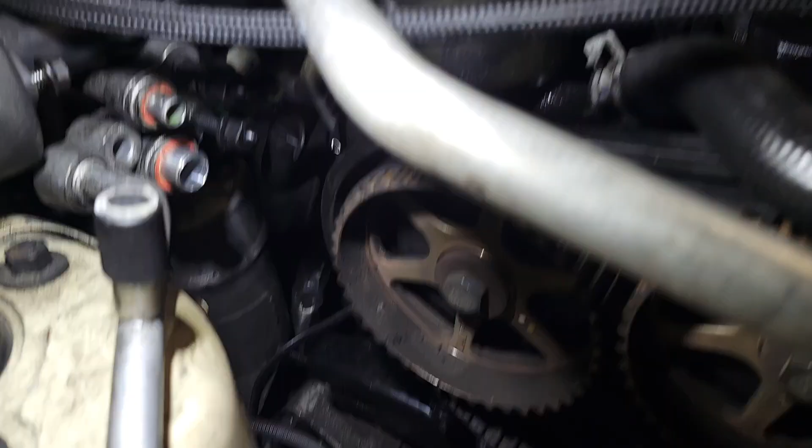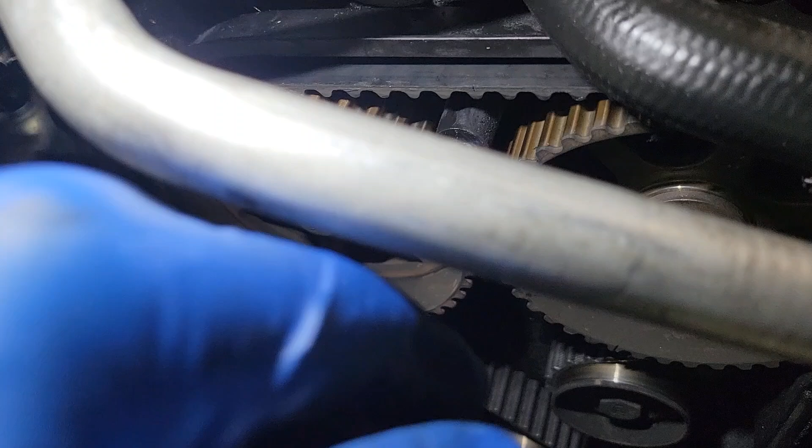I'm just stopping back to give you an update on the PT Cruiser and how that's going along for me. I got the front cover off. This evening when I got home, I had a little time. I took off the front engine mount, and the belt's extremely loose. I mean, you could almost take this off with your hand. Let me see a good way to get down there to show you.

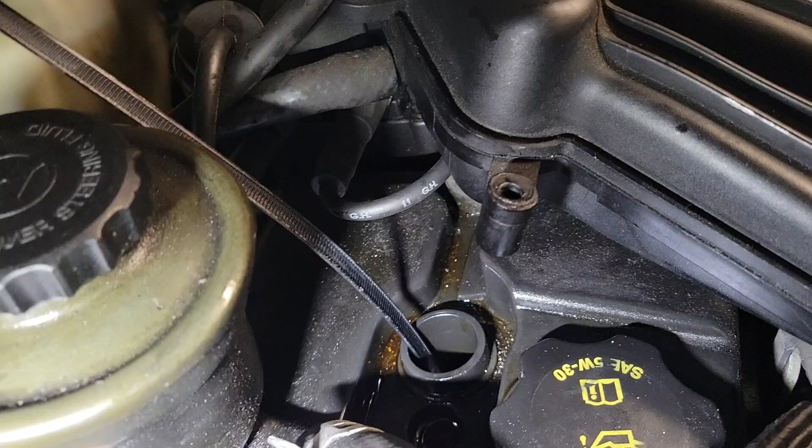So that's where I'm figuring a lot of that sound was coming from. I did take out number one plug. The tube was filled with oil, but that's kind of a different direction. Right now, I want to focus on the timing belt. And then if Ronnie wants to go for the rocker cover gasket, then we'll do that too. But that's where I imagine it's coming from.

But I have it at bottom dead center now. So I just want to look up with a borescope, just confirm that the valves aren't bent. We've seen some good compression humps, so I'm not fearing the worst. I'm expecting to see unbent valves. The tensioner I expected to be in a couple pieces, but it's actually still there. But that's the progress I'm making.

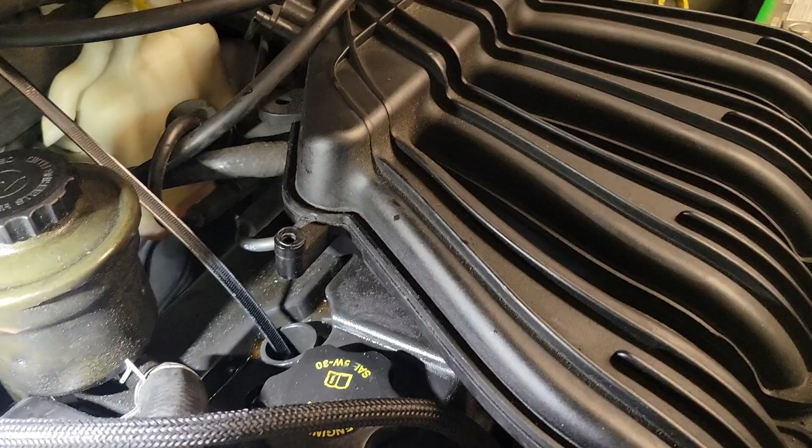I'm going to take some images with the borescope, and then I'll share them with you just to show you what the inside of it looks like. Confirm we have some good valves.

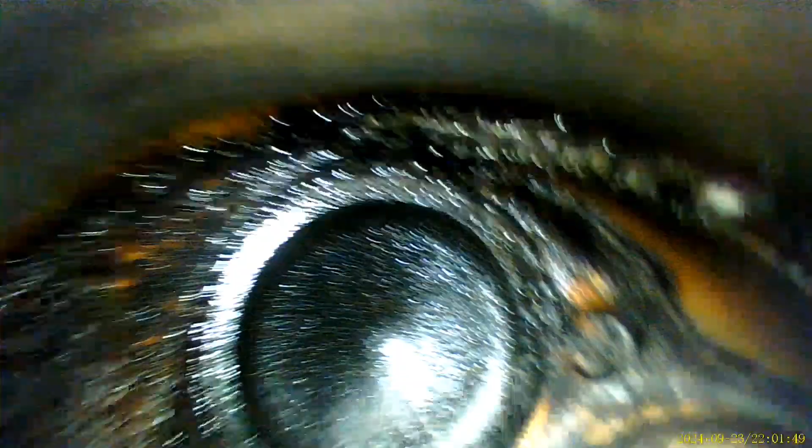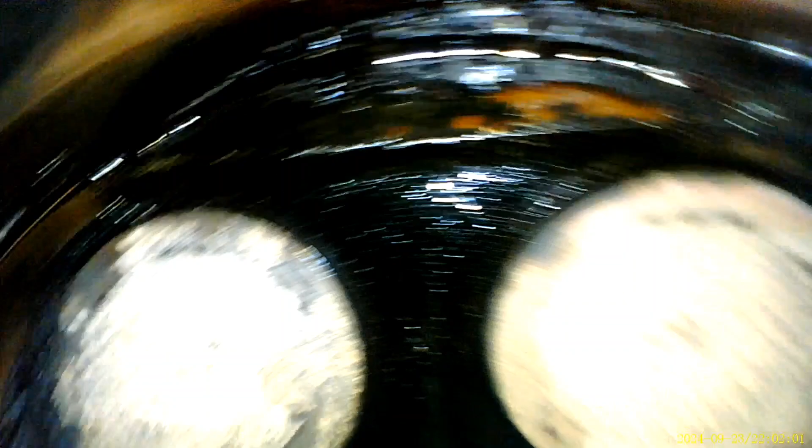All right, guys, I just want to show you. I have the crank at TDC, the compression stroke. In the top, see, it's hard to see from back there, but we're off. It doesn't even appear to be a whole tooth. It's almost like it was stretched to the point of getting ready to jump. Because if you look down where I hit with the light, look how much play is in that belt.

Every time the crank rotates, you could hear it hit the plastic in the bottom here. And whenever it rotates, you could hear the teeth hit off of here and the belt hit off of here. So hopefully that's a lot of what the noise was. Just the way it sounded, I wasn't too confident, and it's just a case where our scopes see a lot more than our eyes and our ears do, because it sounded like it had a lot more wrong with it than the timing belt. You'd expect there to be more damage or more of a difference. It just looks like the belt got stretched to the point where it's definitely ready to jump.

So, no pun intended, it was perfect timing to have it changed right now, because I think if you hit this a couple times with hard acceleration, that thing's going to go. I'll spin it again just to let you see how it bounces off there. On the scope, that's all I was getting to. We saw that image. We knew from the scope that off from the known good, it wasn't much. It was very little. That's why I was surprised to find a belt so loose after only seeing such a tiny bit of difference, but it just didn't actually jump yet. But the scope was able to pick that up.

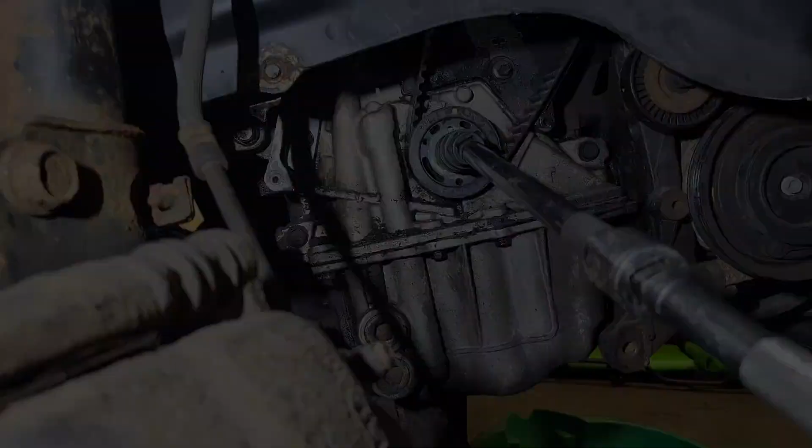Alright guys, I just wanted to share a quick tip in case you're ever in the same situation. I have to take off the timing gears without the belt on it. And the way this valve train is, you don't want to go wracking it trying to loosen the bolts. They do make holders, but I just use the old timing belt, slip it around the sprocket, put it through. This is 1 1/8 inches, and then just tighten it up around it, and bend backwards so you're pushing the rubber down onto the sprocket, making a strap wrench just using the timing belt it came off with.

I was able to loosen up both bolts in a matter of seconds with it. It took me longer to find a wrench than it did to actually loosen them. So just a quick tip if you're ever in that situation too, because they do make holders that go in between the gears, but they're just cheap.

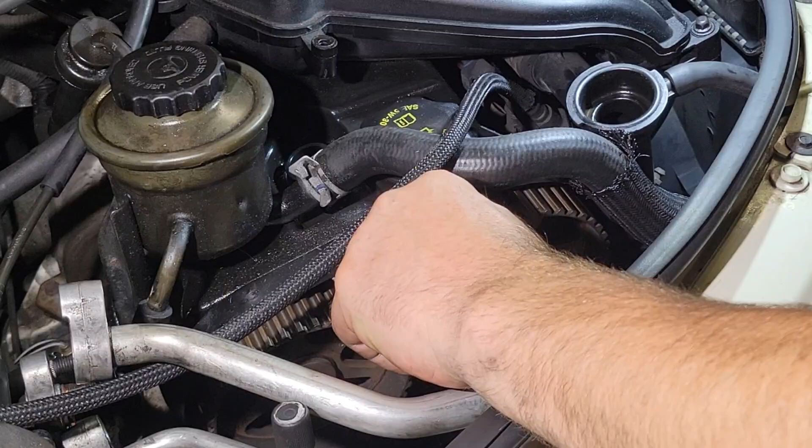Most of them anyways from Amazon are just cheap plastic gears made to hold the cam there while you replace a belt or a chain. But whenever you go to push that, there's all that torque on there, because there's Loctite on them bolts. It takes a little bit of strength to break them free. I don't want that on a plastic tool or on a valve train. So this is a quick tip if you're ever in that situation.

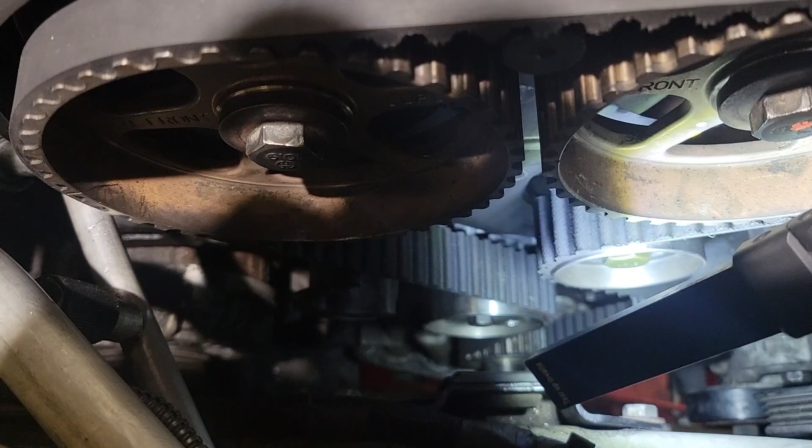The timing belt on these, I mean, they're a bear. In hindsight, I did it according to All Data, the factory technique of putting it on. I'll show you what I mean. They tell you to start at the crankshaft at the bottom and then go around the water pump, around the idler, around the cams, and then onto the tensioner. But there's literally no room; the tensioner's in the absolute worst spot to be the last part to put on.

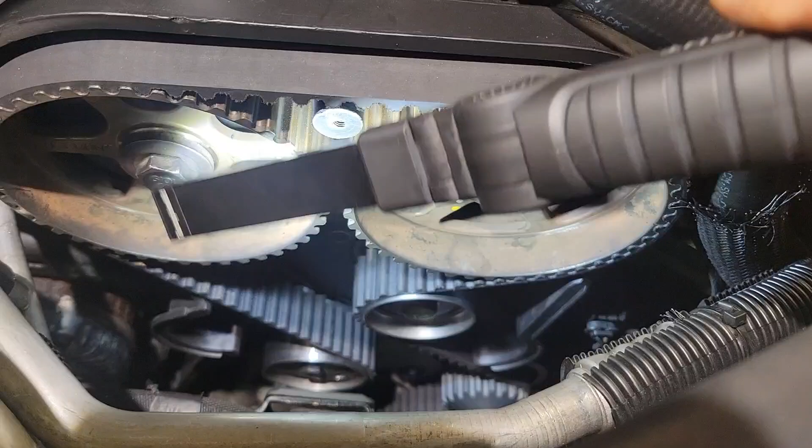So in hindsight, I watched another video this morning on it. The guy said it's common to take these sprockets off. You put it around the tensioner first, because the engine lifts up a good bit, and then it's easier to get the cam bolt onto the cams. That would have been the way I went if I had to do another one, because some of the videos say you're not going to get this on the first shot. They're absolutely right, and it's a bear to get on and off each time.

Whenever you got the notches aligned, this cam wants to move, and they don't recommend a cam holding tool, but the one side will want to move with the other side. A cam holding tool might have been a little bit of help, but basically once you have it on a timing mark, the intake cam will keep it from spinning if you push it down, but you have to hold it down and actually turn this a half a turn this way. But if I put it around the tensioner first and put this camshaft on, it would almost lay flat, and then you have to really push and get it on.

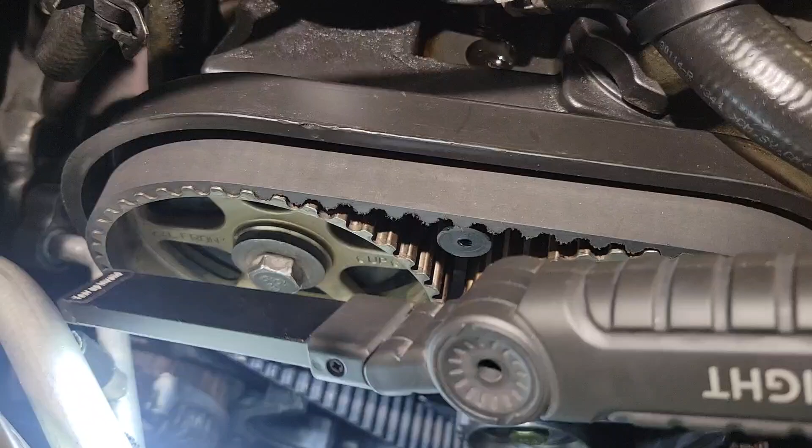But then you have to take it off if you're off one tooth. Once it was on one of the camshafts, the cam moved while I was putting the belt on, and it wouldn't be lined up on the crank. So you have to overestimate one tooth, put it back on, and then get it. If I had to do it again, I would probably do it that way. I don't like doing them like that, but I have before. Some of these belts go on really easy, some of them are a bear. This is a very tight belt even without the tensioner. And if you follow all that, you're trying to get this to slip around there, which you can't see. But anyways, I'll show you the timing.

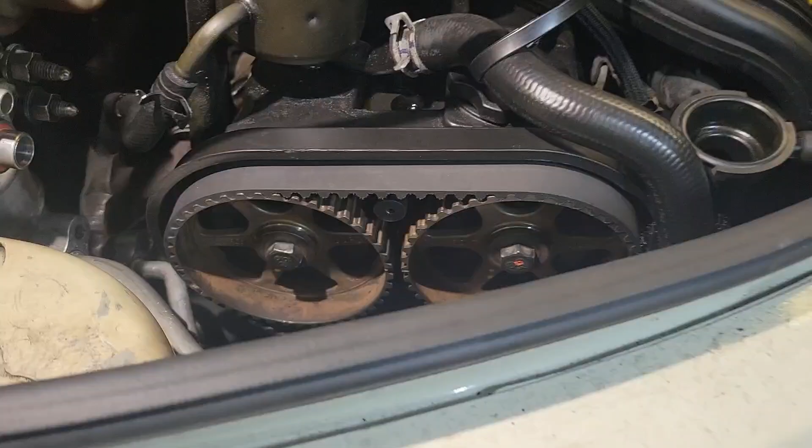Well, there's where the timing marks are after spinning it once. They're both lined up there. Hard to see the white marks on them, but enhance. There's the timing marks there. They're dead on there. And on the bottom, dead on. So now it's going back together.

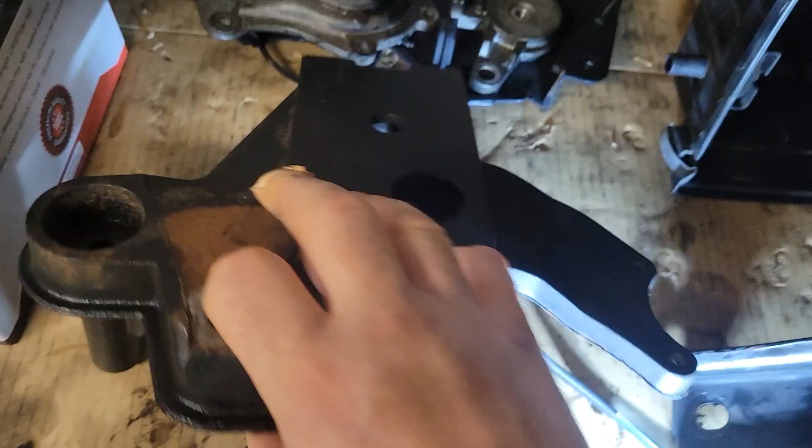The front plate on these, on all the videos I was seeing, they said the worst part of the job is putting this iron front cover back on. But getting it off, they said, was the hardest part of the job, and it came right off. That was actually one of the easier parts of the job.

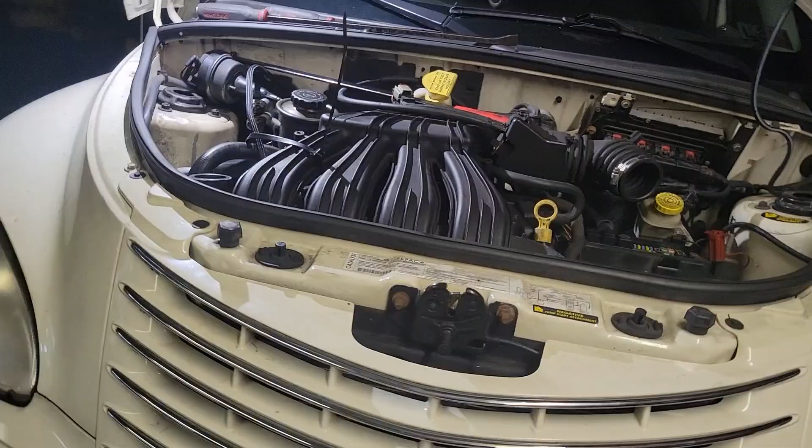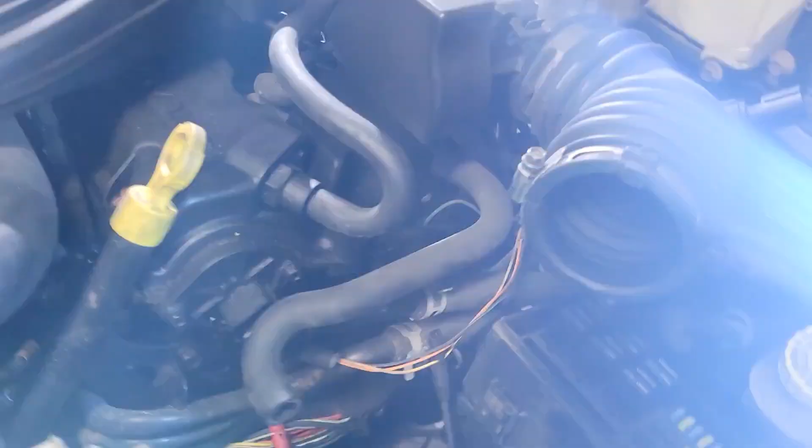All right, guys, that's just a quick update. I'm going to get it back together, and I still have the back probes in. The other side I didn't have to change or do anything with, so we're all set up to get the cam and crank correlation whenever it's all done. I just want to see that little notch line up on the waveform, since we were off just a tiny bit. But the belt didn't move much, so that was good.

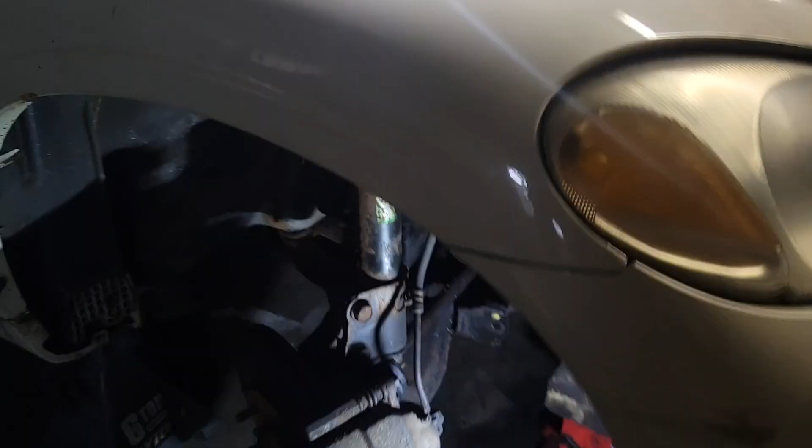Got the engine still lowered. It looks like it's going to be really easier to put the serpentine and the alternator belt on with the engine lower than jack it up. I'm not sure what ALLDATA says. It's like broken into parts, like if you were doing each individual part, but it's just going to be so much easier, so I'm going to take that chance.

It's a pressed on balancer. There's no keyway, anything on it, no timing mark, just the red dots that they put for identification, like checklist stuff. But I just put blue Loctite on it, ran it home with the Kobalt, whatever electric Ugga Dugga is, that's what it's torqued to. It's not going to go nowhere, like it draws it in.

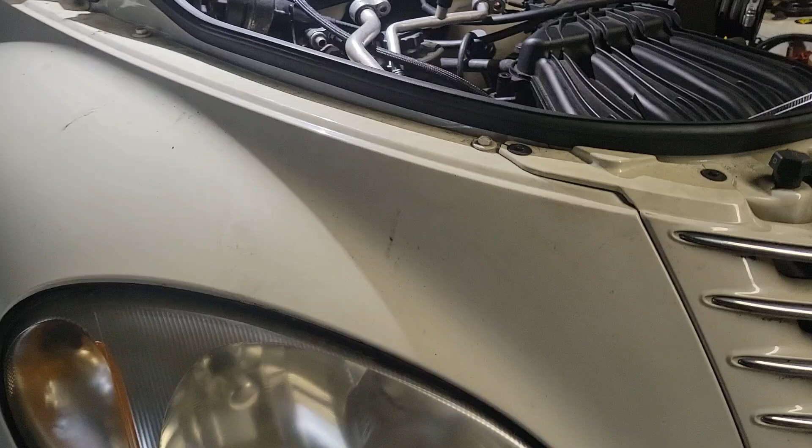It's like a twofer. And I got the top engine mount bracket in there, this black bracket. It was easier with the center bolt out. So it's going okay. You do have to jack the engine up a lot, up and down, just move it around to get the bolts in. The center engine mount, it's a big iron bracket, that one. You have to lower it to get the bottom bolts and raise it to get the top bolts. But other than that, slow but steady.

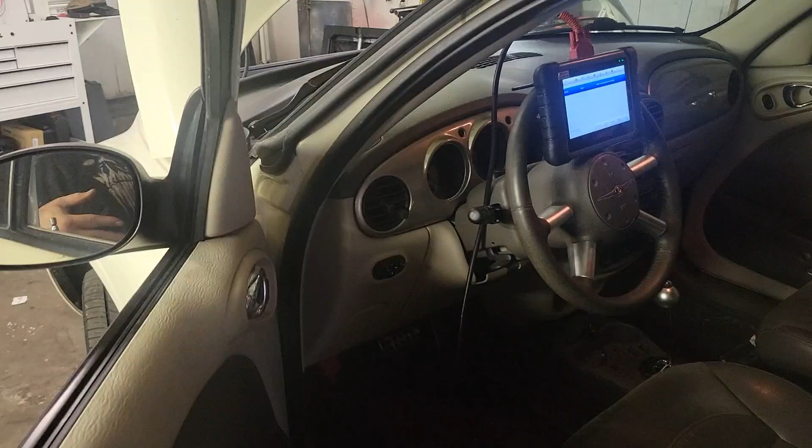All right, guys, the same code I had was from before I changed the timing belt. The air intake temperature sensor, I had unplugged, so I plugged it back in. What I'm going to do is just clear the codes and run it for a while, let the thermostat open, because that's what I like to do. Being as I was putting a new water pump on it, make sure we got no leaks before I put the splash shield and the passenger side tire back on. Then put it all back together, take it for a scoot.

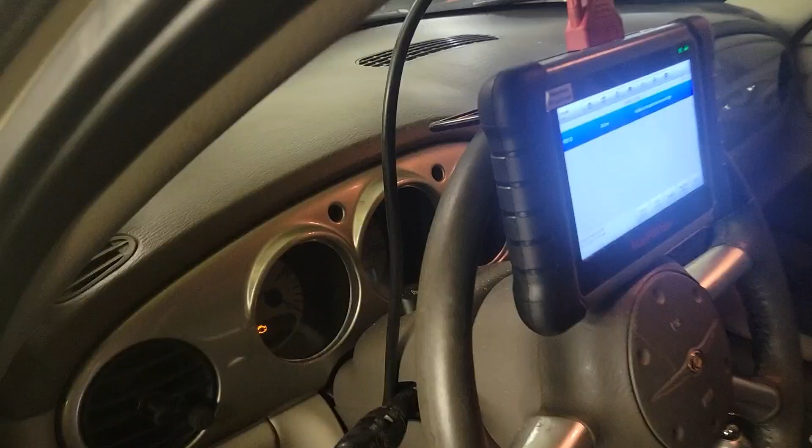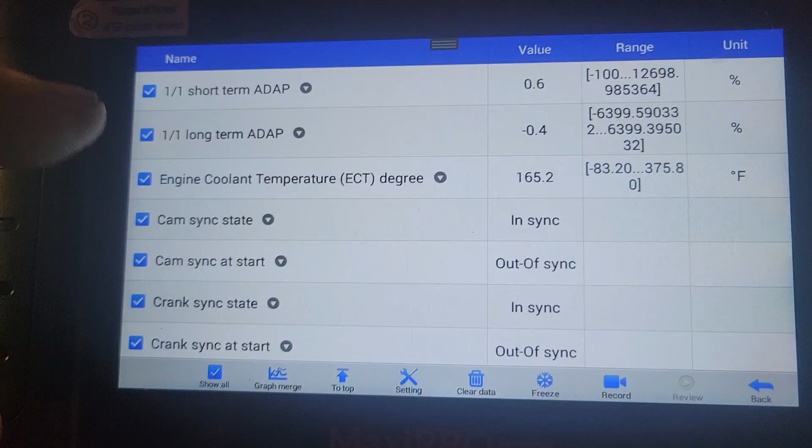Alright guys, there's just some live data that I found pretty interesting. The short term, it's swinging both ways. I mean, that's a good sign. Long term's taken away 0.4. We haven't really run this at its first warm up. The temperature is at 165.2, so the thermostat wouldn't be open yet. But this was kind of interesting.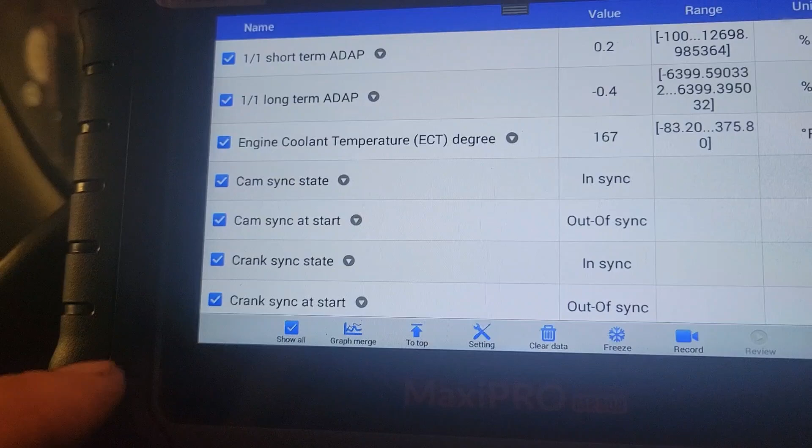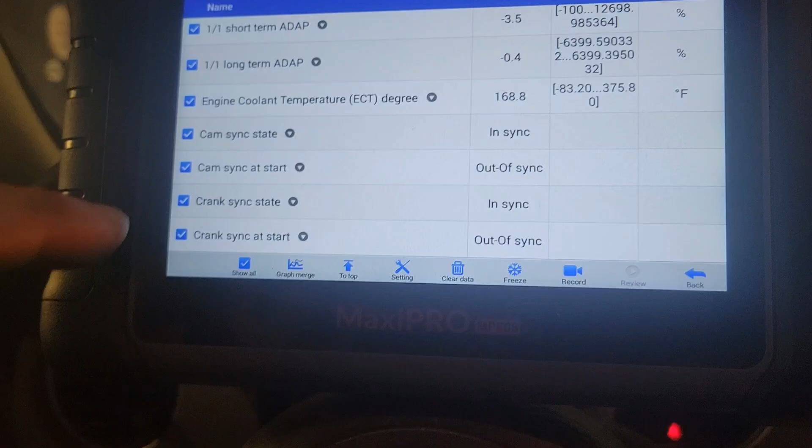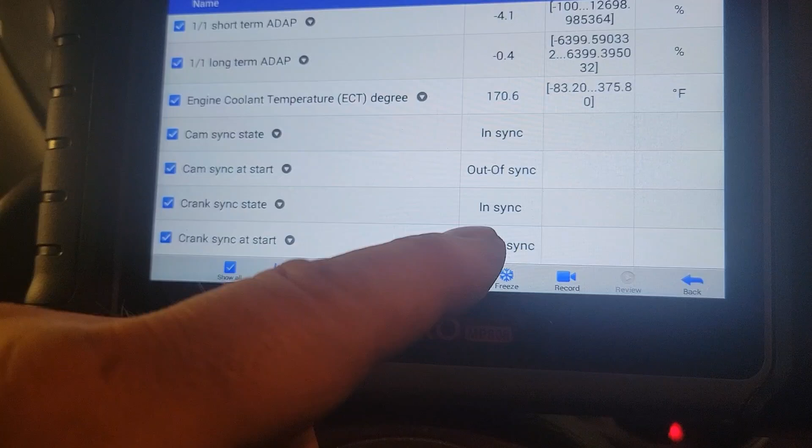But then I realized I plugged the battery back in to do that compression test, the RC test. I never disconnected the battery, so me turning the crank by hand or something must have set it out of sync even with it off, or it's just normal after having the sensors off like that. But actually I didn't have any of them sensors off, but somehow it knew I was turning the crank by hand, I imagine. But it says cam and crank out of sync at start, current state in sync.

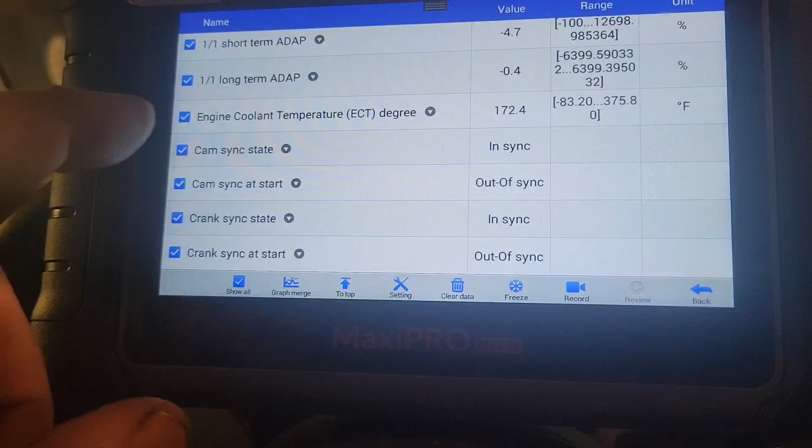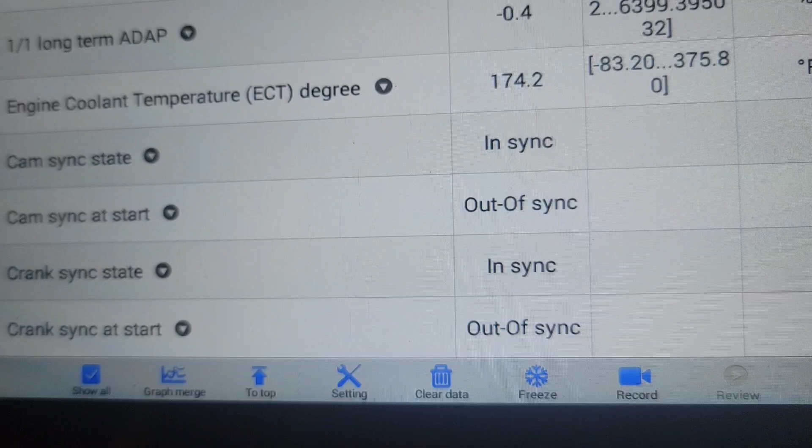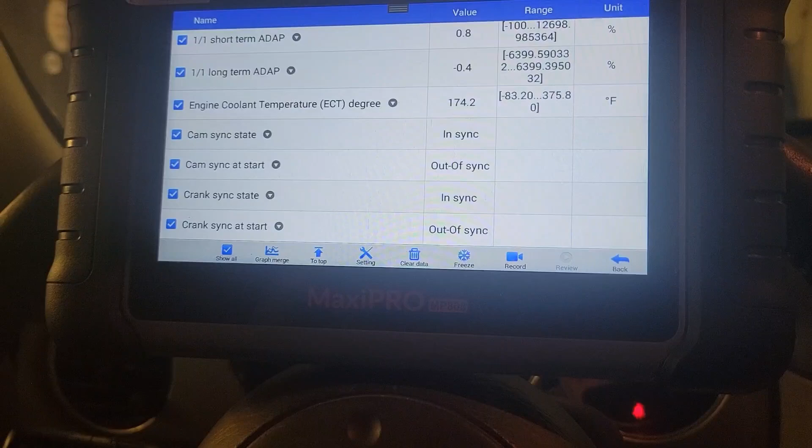I don't know if they give us any more data with that or not. No, just in or out of sync. I just thought it was pretty interesting that it picked up that it was out, but didn't set a code for that, just for the air intake temperature sensor. But so far so good. I'm going to let it warm up, get these main PIDs up, because you can see how it's running if you got a misfire or anything like that. And then you can usually hang it off the window while you're checking for leaks, and you can see when the thermostat opens.

Hi guys, that was a long battle, uphill sometimes, downhill others, but one of the main problems I had is the harmonic balancer. The crank pulley is pressed on, and I had it back together and the belts weren't aligning. They do make a press kit for this, but the regular one the parts store rents won't work on a 2.4. You need one for a 2.0 and a 2.4. Nobody rents them, and they're like $80 online.

So I just put some lightweight oil on, and I kept hitting it with a dead blow until it pressed on there. Just no metal hammer. I just kept pushing it gradually with a dead blow hammer, and got it on there pretty good. But what I wanted to do is just do the cam and crank. I still had the wire piercing probes in the harness from before, and I'm going to run it now and just see what I'm looking at.

Runs good, no codes. Got everything back together, like the inner fender well, everything. Very good. Take it for a test drive after this, but I wanted to make sure the thermostat was opening, no coolant leaks, everything like that. No codes, that's always a good sign. The cam crank's on, so everything's pretty good that way. But I just wanted to go one more time, get the cam crank correlation with the scope.

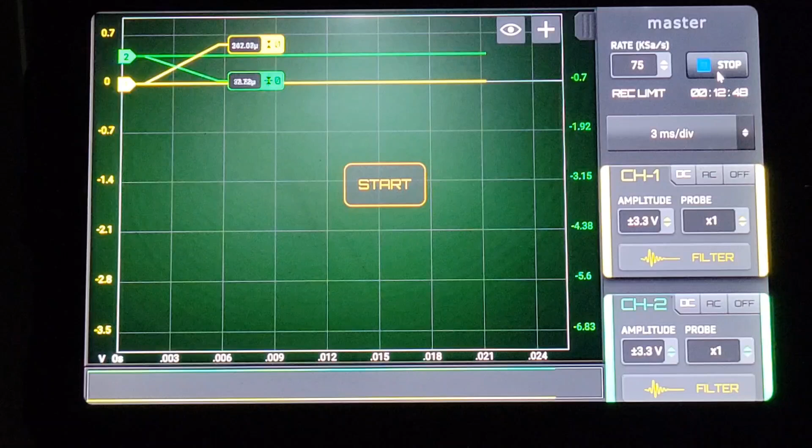Alright guys, I shut out the light to give you a little bit better view. I'm on channel 1, which would be the yellow, that should be the crank sensor, and the green should be the cam. I'm on both of them, 3.3 volt scale, 3 milliseconds and 75 kilosamples a second. Now I'm going to just hit start and start the car.

This thing does have that. That's why I was doing the RC test on it when I heard the way it started before. And I thought some of it was timing, but I think some of it is just the starter, you know, going to the starter, a bad connection. But that's something for another day.

What I'm mainly interested in now is getting it back to him, because I'll show you the puddle that the Cadillac's leaving in the alley. So he has one car running anyway. That should be more than enough.

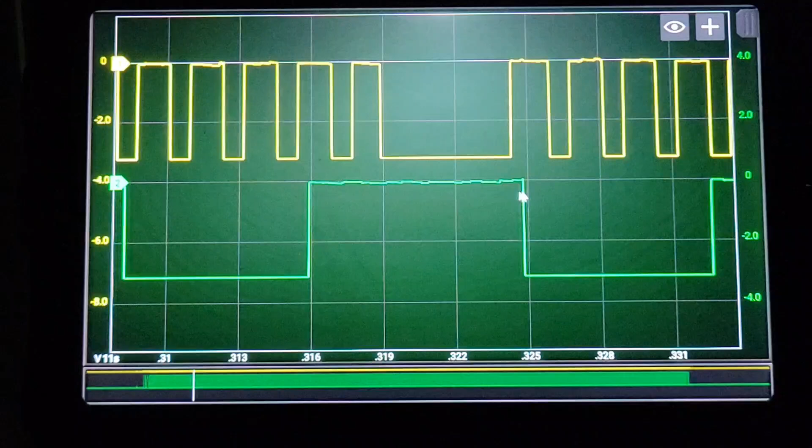Okay, and right here is where I was interested in before, because this signal here was walking outside of the green. And just a refresher, the crank's over to the right slightly, and it looks like the cam signal goes almost through the first tooth.

Here's the one long tooth. Here's the second tooth. So here's where I'd be lining up. The whole yellow tooth is inside of the green, which before we weren't getting that. Here's that sync again that I was using. So the yellow tooth is staying the same. Same distance off of it.

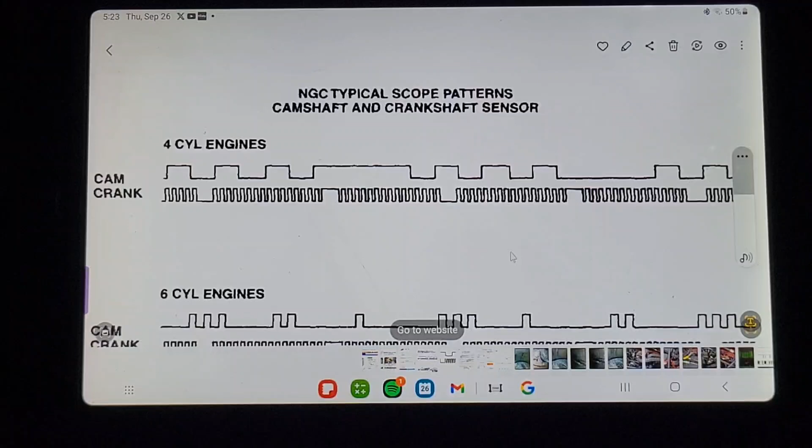See right in here. This whole yellow tooth is fitting in. And looking at that small drawing, it looks like it's almost splitting this tooth. We could see we're a little bit to the right. That'd be right here, this edge coming down. So we were only one tooth off, and that put it back in line. So that's good enough for me. Tell him to take it for a test drive, give it back to Ronnie, let him drive around some.

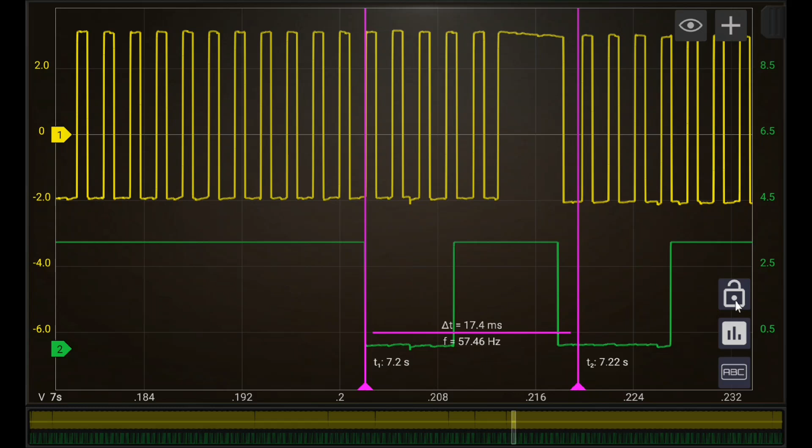Okay, guys, this is just what I was talking about, taking measurements to see if there's any slack going on with the timing chain or the timing belt. What I was doing is just dropping the cursor like that, and then dropping another one. That one I'm on the falling edge of the camshaft, the green. Cursors are locked there. And then I'm going to this yellow edge, the falling edge. I'm going to have to move it again to get the lock back.

But once you get it right where you want it, lock it. And then whenever you move one, you move both. So you could go to a whole other event. You could shrink it down too and check it at all different places, whatever you have in the buffer. And this is the known bad.

See how the cursors didn't move. We're still on the falling edge here, and this should have been on the falling edge of the yellow. On the known good, they stay together, and that's what you're looking for when you're looking for the slop, because it was just within this tolerance. Just one event ago, one rotation of the camshaft, two rotations of the crank, and we're off a little bit.

You can measure out a minute amount, but it really wouldn't be doing us any good. I was just showing you how you could check for slack in it. Do that, and if you're staying pretty much the same, not varying from this, then you know the chain or the belt's pretty tight. All right, guys, I figured I'd include that at the end so you knew what I was talking about all along.

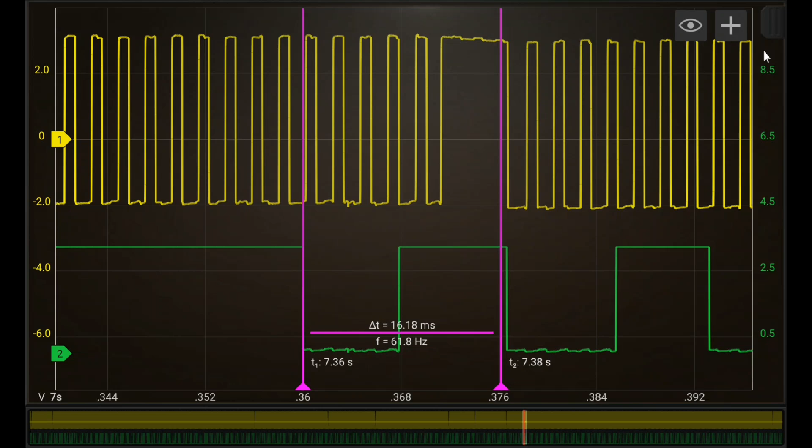I saw Darren on the Mechanic Mindset. He did it, and you could see it actually walking and moving around like that. That's just kind of cool to be able to measure that. But all in all, I really like the confidence the scope gives you going in, even with the sounds that engine was making, and just knowing that you did an RC test. I got it zoomed down pretty good, but if you got humps like that, then you should feel confident.

Looking back in hindsight, you could either put a pressure gauge or a transducer in there and see how much you got, but I was looking mainly to see if this thing hit a valve. If it would smack the valve, there's 4 in each cylinder, so if it hit one of them, we wouldn't have had compression on one of those humps.